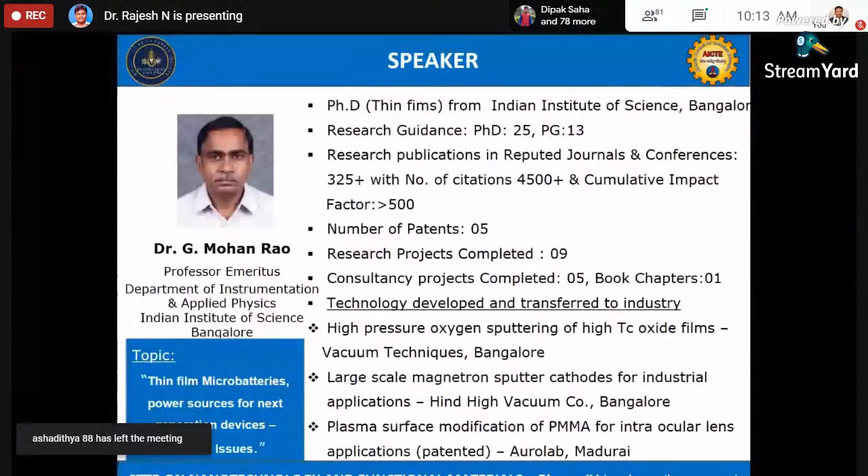Sir, good morning, sir. You can share your screen. Mohan Rao sir, first unmute your mic and then share your screen, sir. Yes, sir, you have unmuted your mic. Now share the screen, sir.

Go to present now, sir. Okay, I'm back.

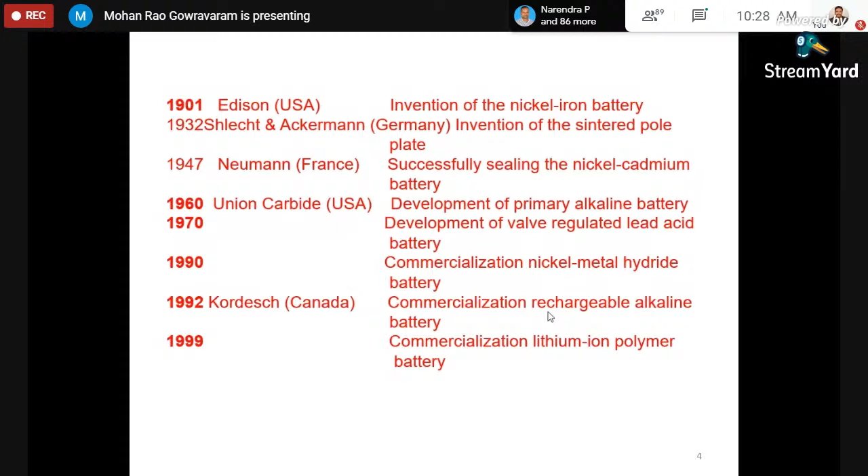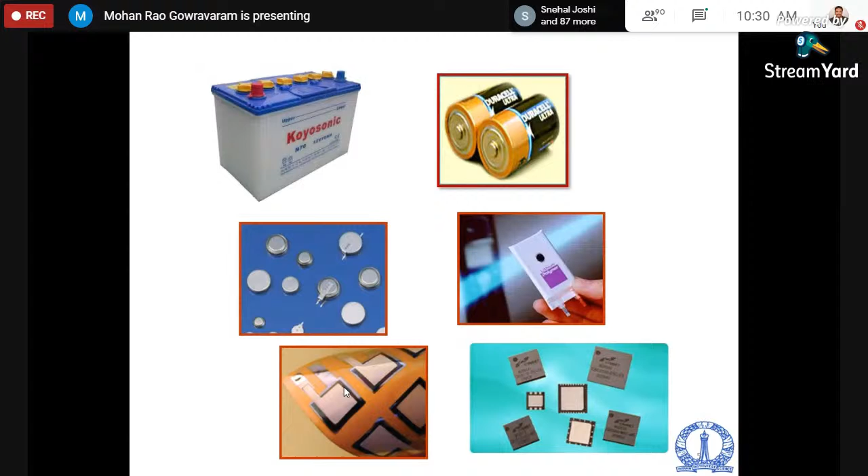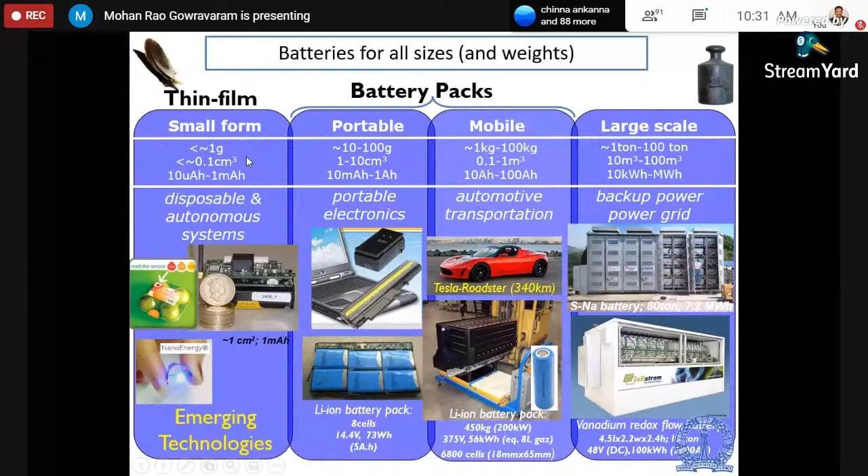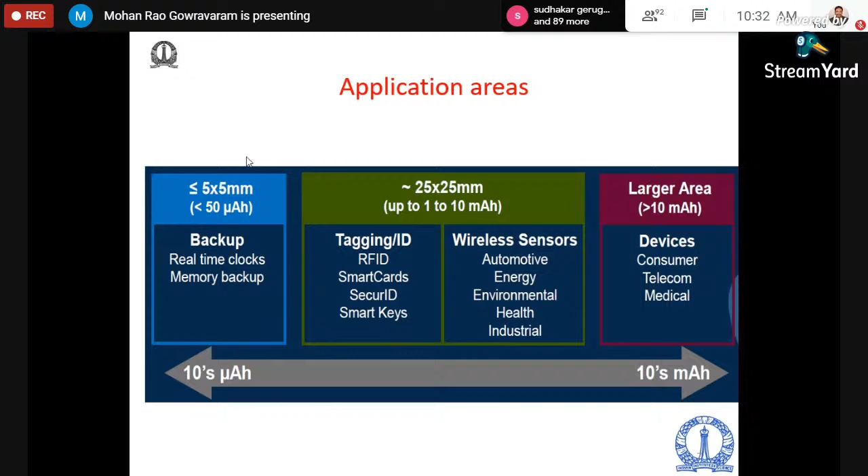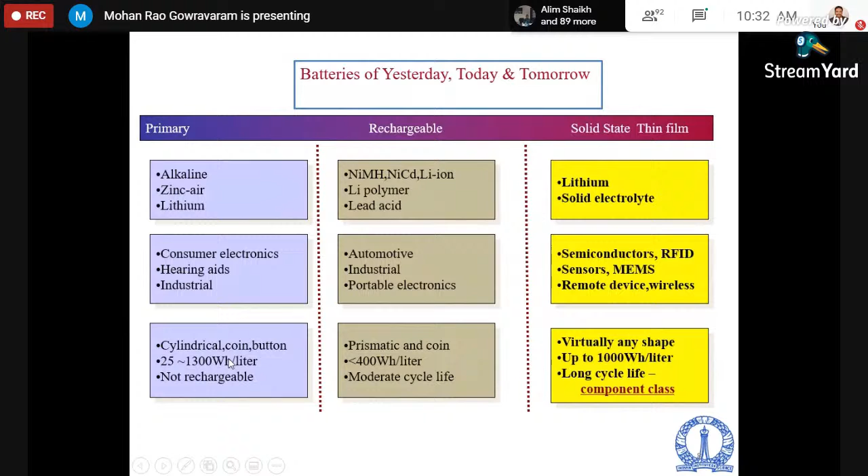Now, the batteries that you come across in your life could be classified into primary batteries and secondary batteries. Primary batteries are your alkaline batteries, zinc air, which could be used for consumer electronics, hearing aids, and all that. They are of the cylindrical cells, button cells, and they are not rechargeable. That means you charge once, you use it, it gets discharged, and then you throw it.

The next battery, which are secondary batteries, which are rechargeable batteries - examples are nickel metal hydrides, nickel cadmium, lithium ion batteries, lithium polymer batteries, and lead acid batteries.

And then the next generation is what is solid state thin film battery, which are primarily, as on today, based on lithium ion battery technology, which uses solid state electrolyte, which could be used for microelectronic devices. It could be of any shape, and it has got long cycle life and long shelf life.

What is this shelf life? Most of the times you would have seen that you purchase a battery today, somehow you don't use it. Whether you use it or not, over a period of few months, it gets totally discharged. So when you have work with that battery, you switch on, it will not work. That means its shelf life is very small.

So the batteries that we are going to talk about are based on solid state electrolyte technology, which means that there is no leakages. So the shelf life is very high, and it could be recycled for thousands of times.

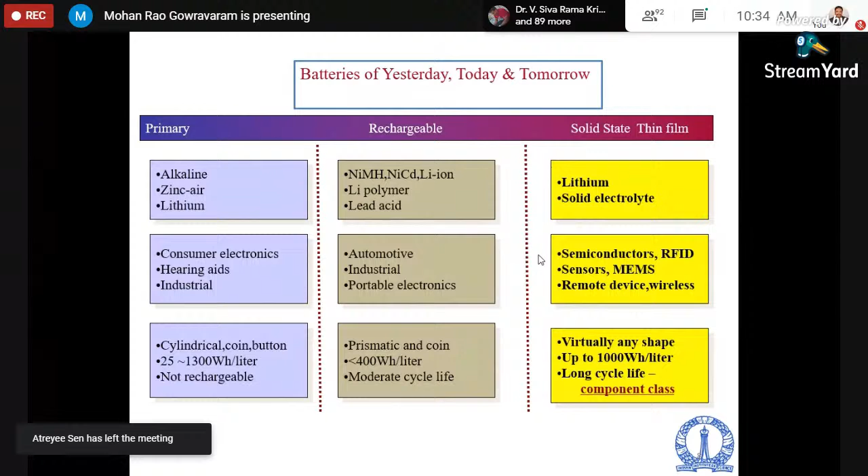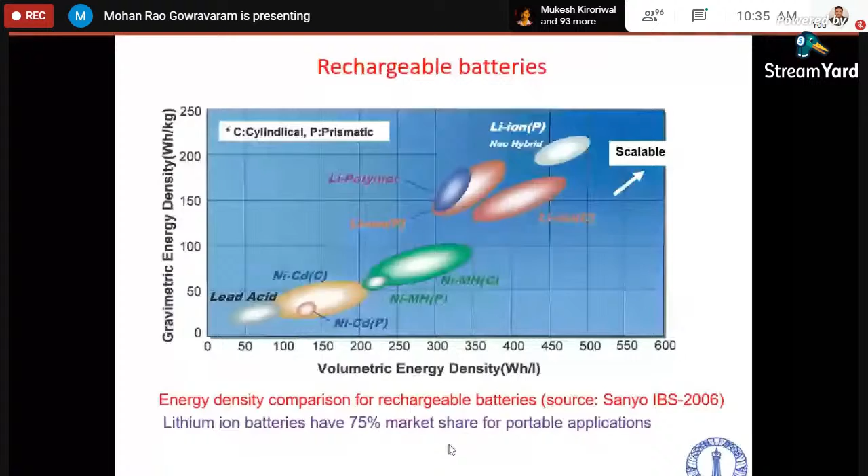Now, the advantages of lithium ion batteries, which are commercially available since early 90s: they have got high specific capacity, twice that of nickel metal hydride, and about 6 times that of standard lead acid battery. They lose only about 5% of charge per month compared to 20% of nickel metal hydride.

And most important aspect of this lithium ion battery is that, as you all are aware, all the batteries that we use give you 1.2 to 1.5 volts output. But these lithium ion batteries are high voltage batteries, which give you 3.8 volts, which is almost 3 times that of the normal battery cell. So that is an advantage.

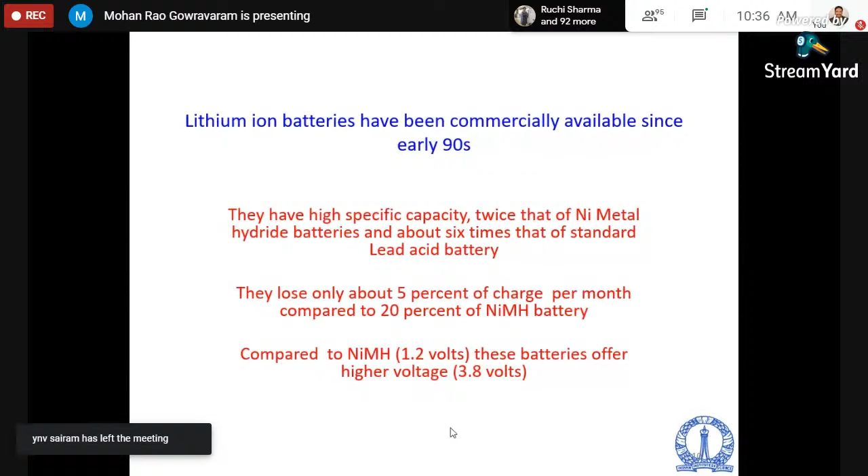Now, how does this lithium ion battery work? Before we get into this, let me tell you why people started looking at making a battery in a thin film form. I'm sure most of you are aware of what these thin films are.

Now, thin film is nothing but, it's again a material in a microscopic form. It has got dimensions which are macroscopic across the length and width, but along the thickness, it is microscopic. It will be less than a micron thickness. Now, why do we need this?

For most of the applications, we do not require the bulk material, but it is a surface phenomena that we use for applications. For example, if you are trying to draw a current of less than a milliamp, what is the point in using a wire which is 1 mm thickness, which can draw current of 5 amperes?

So, when the microelectronic revolution took place, when the power consumption for the devices has come down, people started making microelectronic devices with thin film electronic components like resistors, capacitors, and all that. And the interconnects also were made by thin films. So the thin film technology grew along with the microelectronic technology. Then people thought in early 80s, when the integrated circuits entered the phase of VLSI, though the size of the chip has come down to less than 1 centimeter by 1 centimeter, with a density of more than a million transistors, the way you power this device is still the old way.

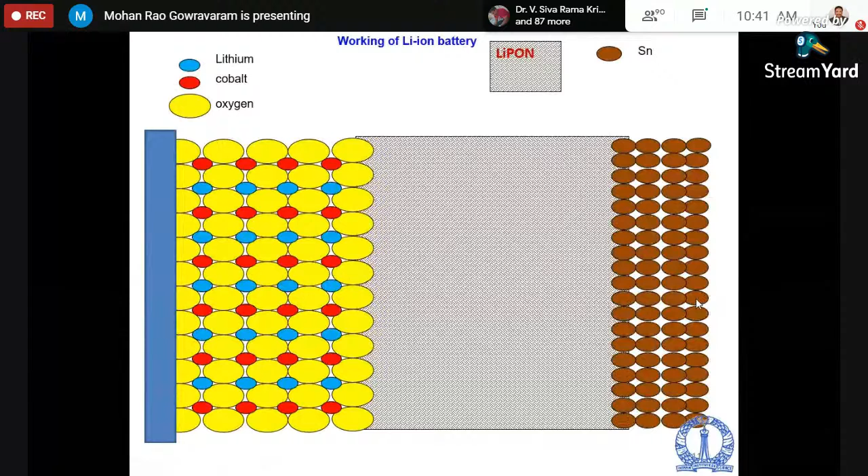Whereas in your mobile phone, you do not have the solid state electrolyte. What you have is a polymer gel material which replaces the LiPON. Then comes the anode, which could be an electrochemically active metal. In our case, we are going to see how tin could be used and why tin has to be used.

Now, this is the assembled battery that you have in the totally discharged state when you assemble it. Now you start charging the battery. When you start charging, the lithium from the cathode migrates towards the anode through the electrolyte, and this process is called intercalation. Now you keep charging it. Based on this reaction, electrons are generated. Once it is in a fully charged state, you see that a virtual layer of lithium has formed between the electrolyte and the anode. So now it is in a fully charged state.

Now on the cathode side, you see that almost 50% of the lithium has moved to the anode side. For the structural stability, it loses only 50%. If you try to draw more than 50% of lithium, the cathode loses structural stability and it collapses.

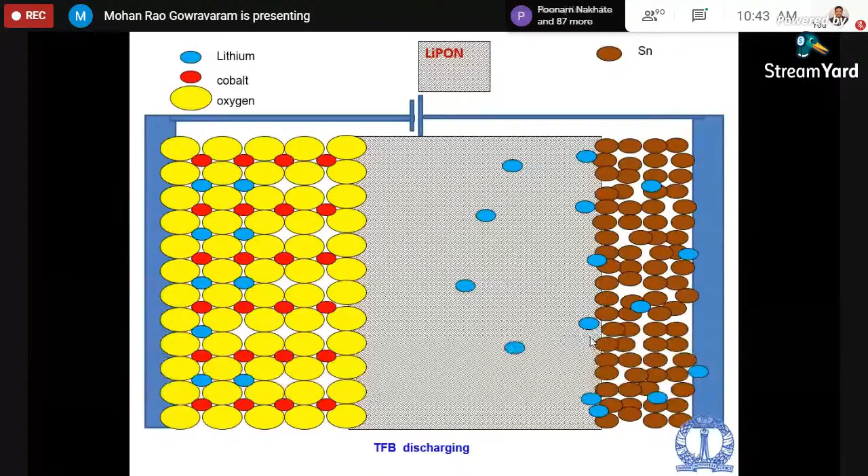Now, once you are in a charged state, you try to use it - that means you are trying to discharge the battery. When you start discharging, the lithium that has gone to that side will come back to its original position. By the time it is fully discharged, all the lithium should come back, ideally. But it doesn't happen. Sometimes some lithium is left behind because it feels more comfortable there; it doesn't come back. Because of this, for the next cycle when you are charging, the capacity will reduce. So with each cycle, if some lithium goes and sits there, finally the battery will die.

Now, when you try to make a good battery, the first important aspect is that all the lithium that has gone there should migrate fully, and whatever has gone should come back. That means ideally this should be a porous structure for the anode. The second aspect is that when the lithium goes from the cathode to the anode during charging, there is a volume expansion taking place. And when deintercalation takes place - that means when it is discharging or when the lithium is coming back - there is a contraction taking place. That means during the charge-discharge cycle, your battery is undergoing volume expansion and contraction. So structural stability is very important to accommodate this volume expansion and contraction.

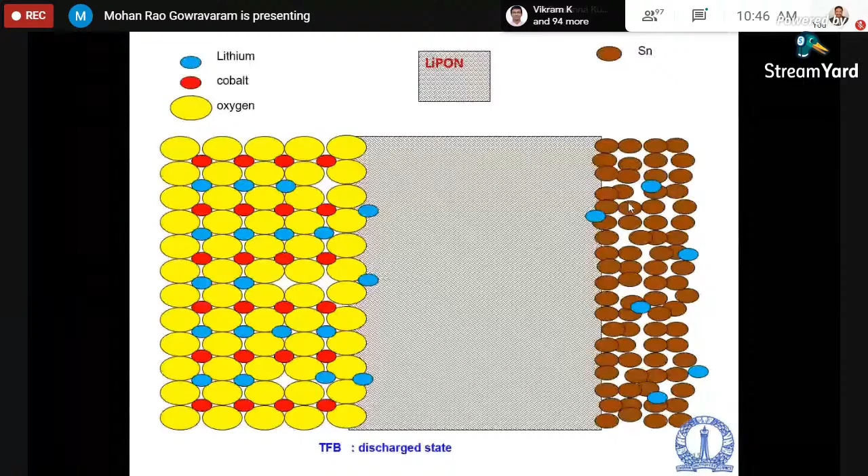Now, what happens when there is a volume expansion? At the interface, there will be a lot of stress, so the film will peel off, and the battery will collapse. So one has to be really careful with the process to make your layers deposited such that this volume expansion and contraction business is taken care of. Let us see how one can do that.

Having known something about this battery, let us see what a thin film battery looks like. A thin film battery is a robust, rechargeable, micro-sized solid-state energy storage device. It has got extremely long cycle life, very low self-discharge, high power capability, etc. And it is very safe because there is no liquid electrolyte.

Now, what is this liquid electrolyte problem? Why is it not safe? When Sony developed the first lithium-ion battery and used it in their mobile phones, there were heavy casualties in the sense that during charging, the battery blew up, causing casualty of the person standing nearby.

What happens is that in bulk batteries, over a period of time, the anode used was carbon, graphite. This graphite forms dendrite structures, and through the electrolyte, it pierces through and touches the cathode material during charging, and it short circuits, and that's how sometimes the batteries blow off. Even today, not that often, but still we come across news items saying a battery has blown up while charging. So this is the reason.

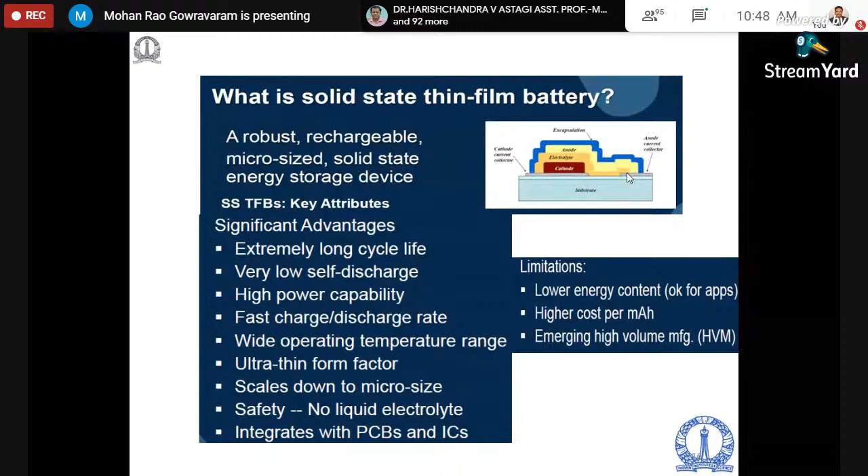Now, as you look at this structure of a thin film battery, it has got a substrate. That means a substrate has to hold the thin film you are going to deposit, because the total thickness of the battery we are talking about is less than 10 micrometers. So for structural stability, it should be placed on a substrate. Now this substrate doesn't play any role in your battery, so it could be anything. If you remember in the first slides, I showed that tomorrow you can have a battery on a polymer sheet also.

So this is what it is. You have got a substrate, originally thought to be silicon because they wanted to make it for microelectronic devices. Then you deposit a current electrode, current collector, and then you have a cathode layer, that is lithium cobalt oxide. Then an electrolyte layer is built onto this one, that is your LiPON, and then there is an anode layer, and then a current collector. As I said, the entire thickness of this battery is less than 10 micrometers, whereas your silicon substrate is not less than 250 micron thickness.

Now it could be fabricated on any shape, size, etc. You could use any substrate: silicon, alumina, quartz, polyester, kapton, whatnot. Anything could be used.

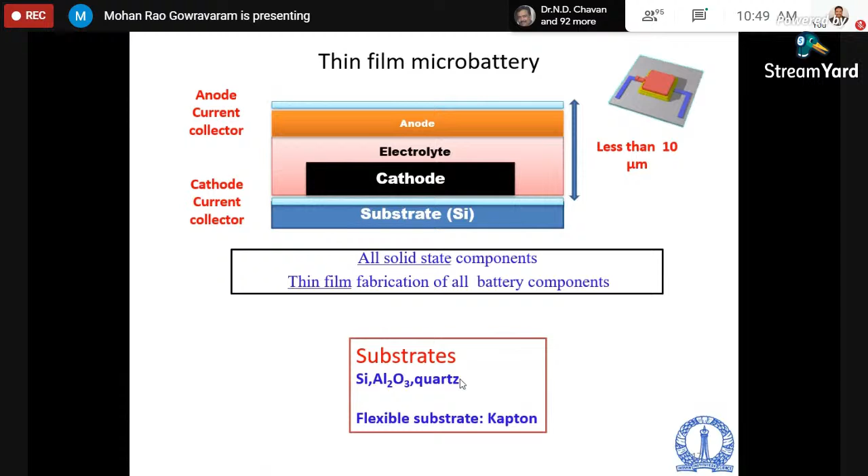Now, as I said, the issues when you make thin films of any material are that, if you remember, we said lithium cobalt oxide is electrochemically active when it is LiCoO2. That means when you are trying to deposit a thin film of this material, the thin film also should have these elements in the same proportion: 1 lithium, 1 cobalt, and 2 oxygen. That's the first issue. The second issue is that you have a substrate onto which you are depositing a cathode layer, and then electrolyte layer, and then anode layer. That means each of these layers should stick together effectively.

Then the third important issue is it should be able to take care of the volume expansion during lithiation and contraction during delithiation process. And finally, it should be stable against ambient conditions. What is there in the ambient? Most of it is water vapor, oxygen, and nitrogen. Nitrogen doesn't react with this, but water vapor and oxygen, it reacts. So the entire device has to be packed properly so that it is protected from the environment.

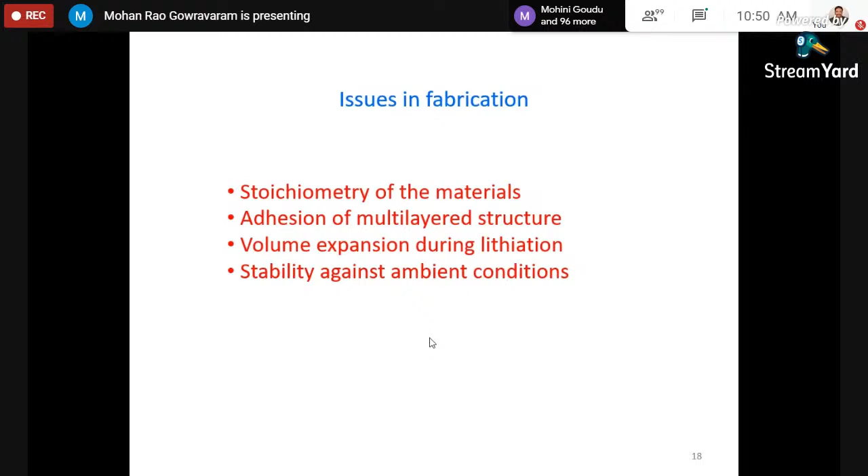Now, having understood the issues involved in making a thin film battery, let us see how one can realize these thin film batteries in real life.

Now, these materials are well studied in bulk form, but then they have to be deposited in thin film form. So people use techniques like sputtering or evaporation to deposit any material in thin film form. Since this is a workshop on material science, let me tell you one important thing: every day a lot of new materials are being discovered for several novel applications. But it has come to a stage that no matter what material you discover, unless that material could be deposited in thin film form with similar properties, that material has no value, because today all the applications of this material have thin film form in it. That means miniaturization is the theme of any device today.

And how you deposit these thin films is basically by two important techniques. Though there are several other techniques, these two are still predominant: one is evaporation, the other one is sputtering. Now, for the sake of people who do not know what evaporation and sputtering are, I'll spend a couple of minutes. Any material will have three states of matter: solid, liquid, and vapor. So you have a solid material, and when you heat it, it becomes liquid, and you heat it further, it evaporates. Now, what is evaporation?

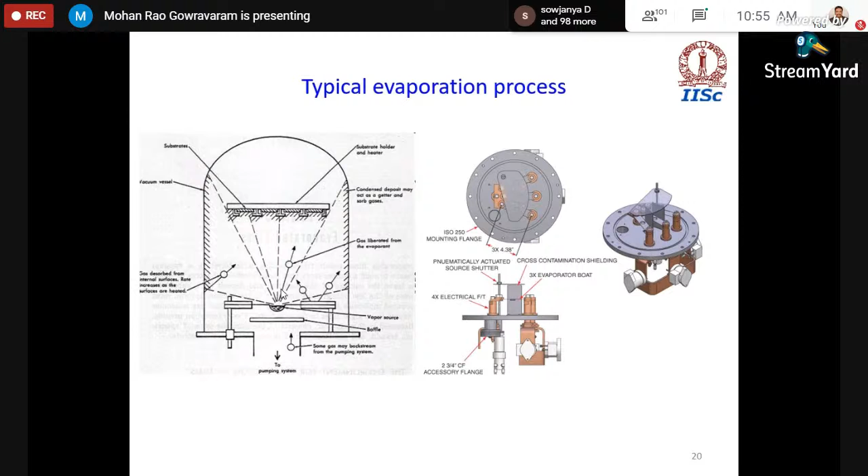Now, if you have got a single element in your material, then there is no issue. But if you have got 2 or 3 different elements, then what happens? Each element has got its own vapor pressure, so all of them will not evaporate in the same proportion that is available in the bulk material. So this kind of technique cannot be used when there are multi-elemental materials. So people go in for another technique called sputtering, where you have the material lattice, and then you bombard it with an energetic particle.

Typically you use an ion. So when the ion bombards, what happens? It is like a carom board. In a carom board, you arrange all the coins, whites and blacks, in the center, and in the center you have a red, and you have a striker with which you push towards the center. Depending on the angle at which you are hitting, and the energy with which you are hitting, the probability of pocketing the white in the first attempt varies. Sometimes the striker may not even reach the lattice.

Exactly similarly here, depending on the ion energy and the angle at which it is bombarding, the atom that comes out will vary. So the ion transfers its energy and momentum to the surface atoms, and these surface atoms come out and travel, because it is done in vacuum, and then deposit onto the solid surface that is kept in the line of sight. This is the sputtering process. Here, basically energy transfer is taking place. No heating is taking place, so there's no vapor pressure concept.

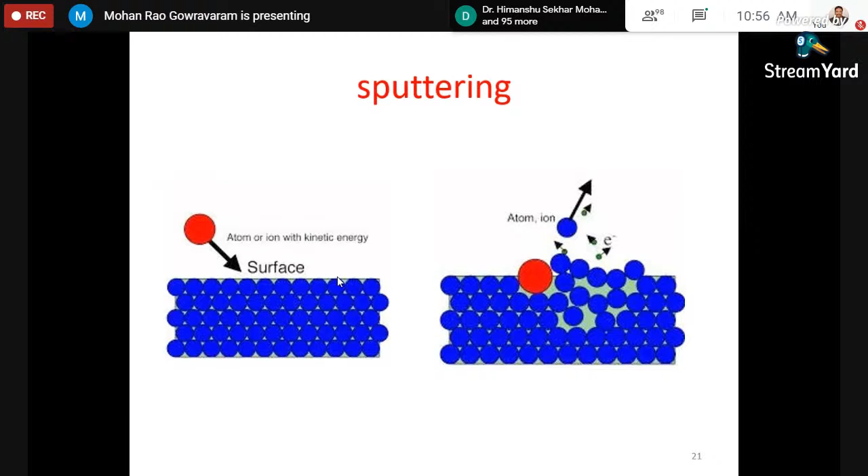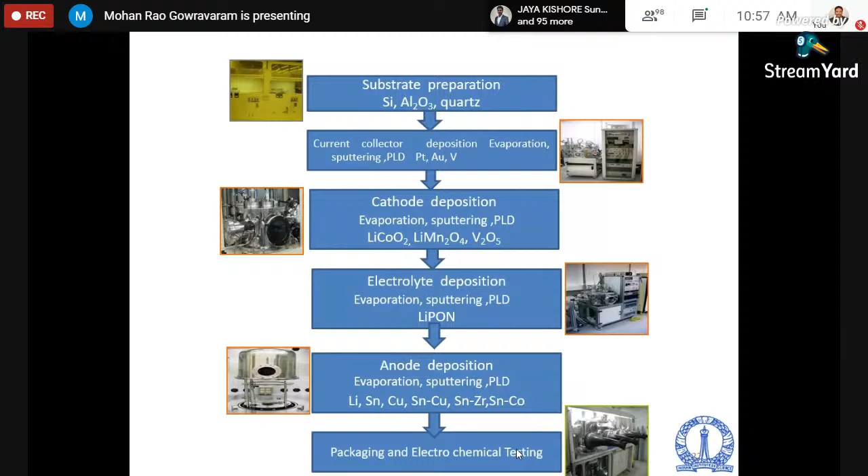So with this, if you try to develop thin film batteries in your laboratory, like any other materials research, you have to undergo all these steps. You start with the preparation of your substrate, meaning you clean your substrate properly, and then you have a deposition chamber where you deposit a current collector, then another deposition chamber for cathode layer deposition, then electrolyte deposition, then anode deposition, and finally packaging and electrochemical testing. So these are all several steps involved in developing a thin film battery. This is on the fabrication side.

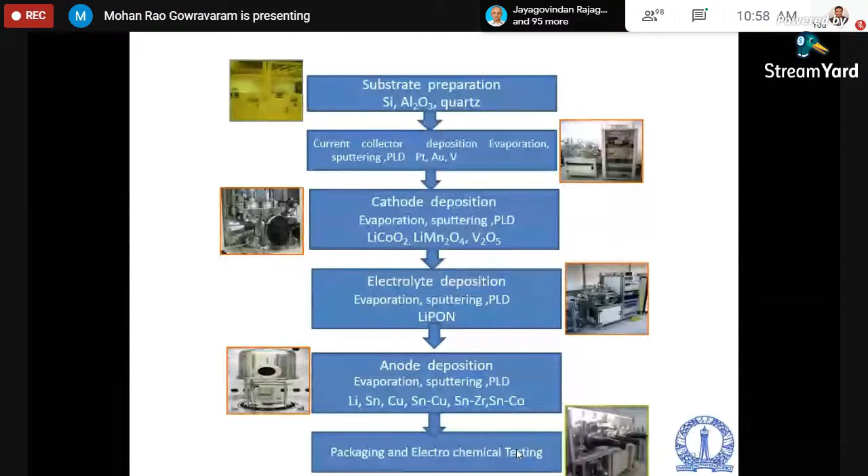But then at the development stage, at each stage of this material development in thin film form, it has to be characterized so that you are sure that it has got the same stoichiometry and same properties as the bulk materials. So you have to do all this kind of characterization for arriving at a final thin film battery device.

So this talk essentially is on taking a raw material, how you end up making a device. So what are all the steps that are involved at each stage? We'll see what are the tools that we use.

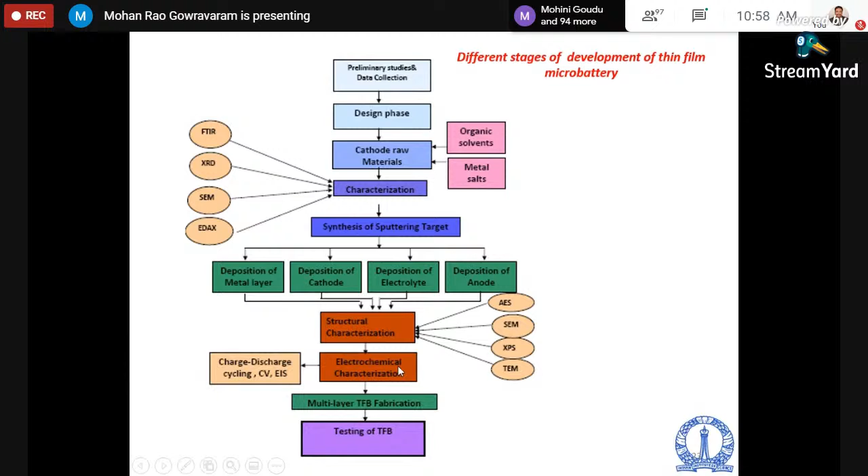These are all typical characterization techniques that you use, like FTIR, X-ray diffraction, scanning electron microscopy, and for chemical composition you have EDAX. And for cleaning and other things, you use organic solvents and metal salts, and then you synthesize a sputtering target. Then you do all this kind of structural characterization, electrochemical characterization, and multi-layer fabrication, and all this.

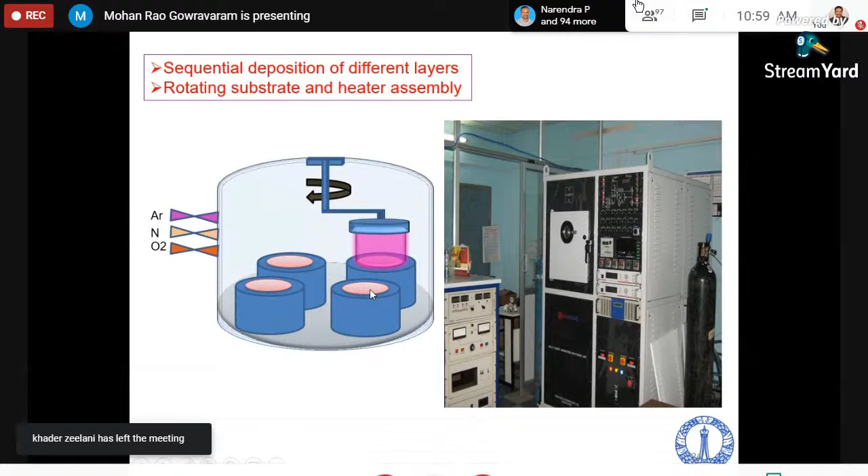So this is a typical sputtering system, which has 4 cathodes. Cathodes have the material that you have to deposit in thin film form, and on the anode you keep your substrate or wafer, which could be rotatable so that it moves from one target to the other target. So you start with metallization first, then cathode layer, then the electrolyte layer, then the anode layer, and then come back to metallization.

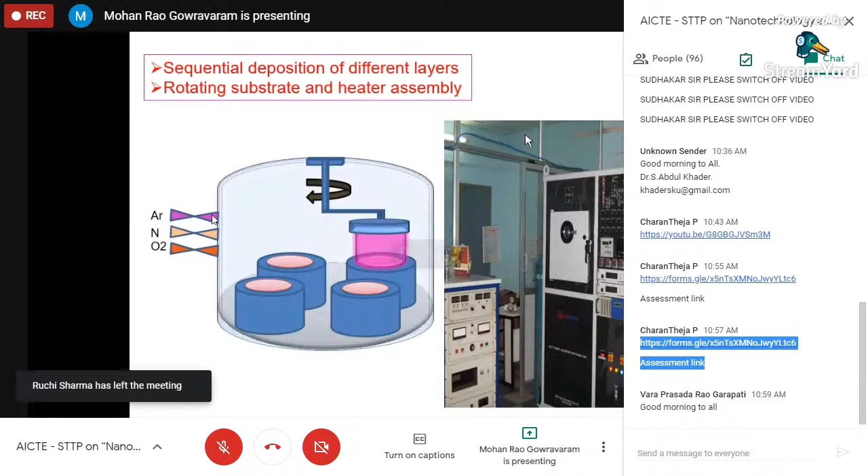The gases that you are using are argon for striking the plasma, nitrogen for depositing LiPON, because if you take a lithium phosphate target Li3PO4 and put it in nitrogen plasma, some nitrogen replaces oxygen. Oxygen is also introduced during deposition of lithium cobalt oxide, because when sputtering lithium cobalt oxide there is a possibility of dissociation of some oxygen, so that has to be replenished by external oxygen.

Now, on the surface of your target, there will be a lot of contamination because it was exposed to the ambient. So initially those layers have to be removed, and at the development stage in a laboratory, one can use what is called an optical emission spectrometer to see whether your target is in good condition or not.

How it works is that your sputtering process involves a plasma. Plasma is nothing but ions and excited species of the materials present inside the environment. So as the material is getting sputtered, it gets ionized or gets excited, and then you collect the light through an optical fiber and give it to a monochromator, and this is the spectrum that you see.

Now, if you are sputtering lithium cobalt oxide in an argon and oxygen environment, the ideal condition is that you see lithium, cobalt, oxygen, and argon ions or excited species. If you see anything else, that is a contamination.

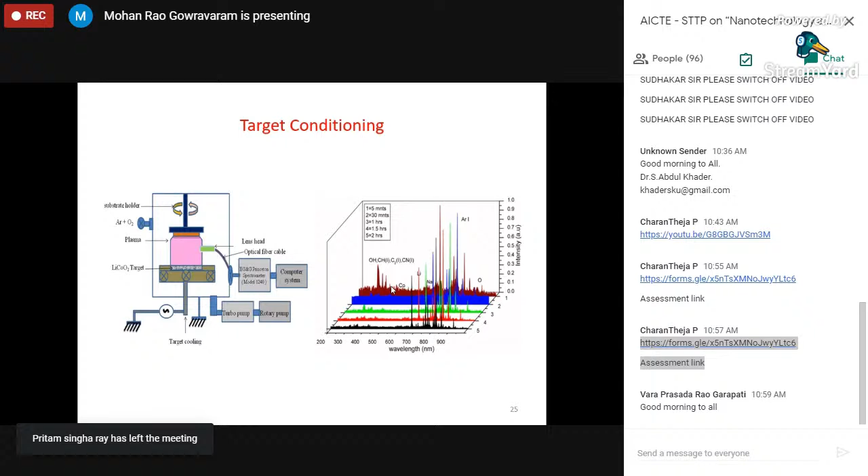And then comes the most important thing: at what pressure you have to do sputtering, what should be the distance between your target and the substrate, and what should be the substrate temperature to get a stoichiometric film.

Now please remember, this is for the young people who are listening to this talk. Most of us do research based on what is called literature survey. When you start research, your guide will say, first go and do a literature survey on this material, how people have formed this thin film. You come with some data.

So somebody has put it at this pressure, this temperature, so I'll also do this. Now, we also did like that. The student did exactly with the same conditions listed in the literature, but it did not work. Then we realized why we did not get the thin film.

Now you have to remember one important thing, that the scientific literature has got certain issues, in the sense that if it is a technologically important research, people will not reveal the actual process parameters. Why should somebody take my hard work? That is the basic idea. So one has to use some common sense also.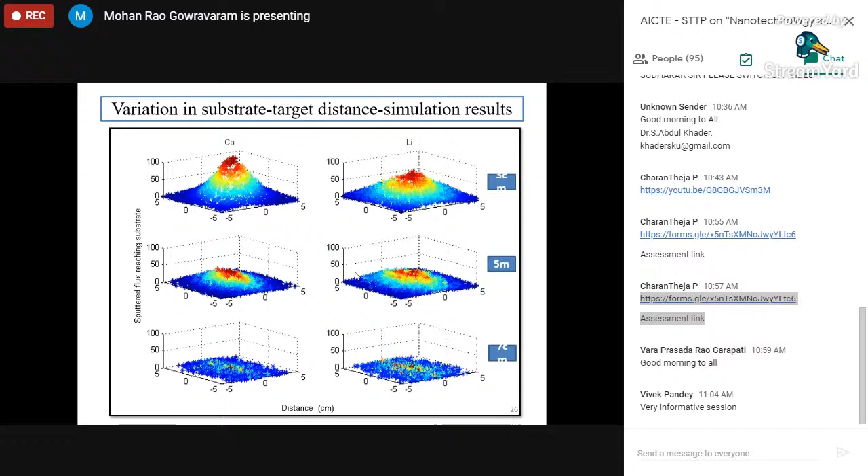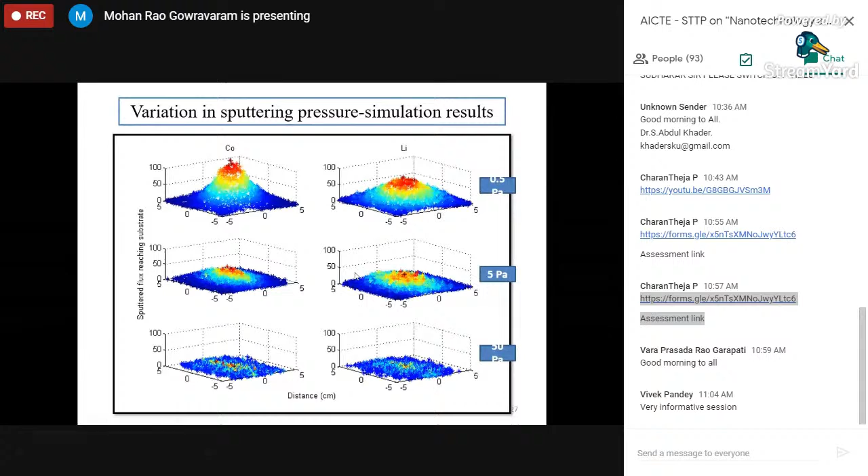Similarly, you simulate what happens when you change the pressure. You come out with some pressure data where you see all the elements present in your film. So you use this target to substrate distance and this pressure and deposit thin films, and then you find out what is the cobalt and lithium atomic ratio, and then you optimize the process parameters.

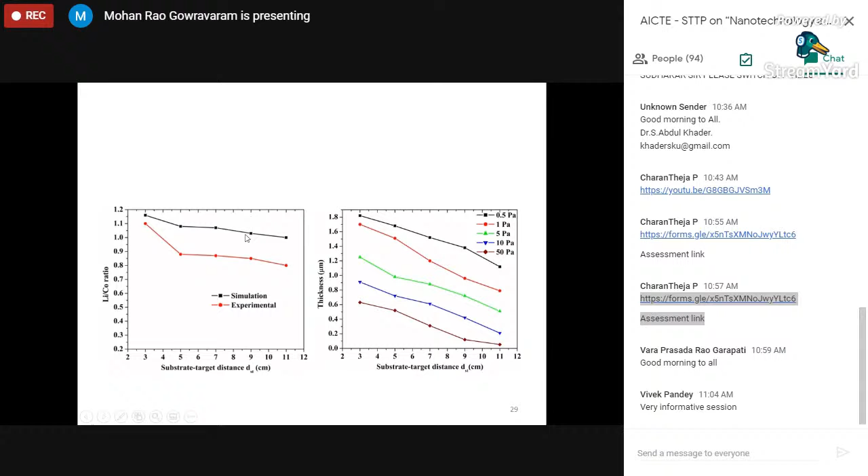So here you see the simulated data and the experimental data. That means this is where one has to deposit thin films. With this, you deposit a thin film of lithium cobalt oxide. Now your job is not just to deposit a lithium cobalt oxide film, it should be electrochemically active because that is going to be the cathode material.

So you perform an electrochemical study, which is also called CV study. One is the oxidation peak, one is the reduction peak, that means it is electrochemically active. The film gave a charging capacity of 160 microampere hour per centimeter square and a discharge capacity of about 130 microampere hour per centimeter square area for 1 micron thick lithium cobalt oxide film. That means your lithium cobalt oxide is working.

Now your job is to check whether it is rechargeable. You keep working for several cycles and it worked for more than 30 cycles. So now it is rechargeable. The first part of your battery is ready.

Now you move to the electrolyte material. As I said, liquid electrolytes have got very high ionic conductivity of the order of 10 to the power of -1 Siemens per centimeter. But your solid state electrolyte has got 10 to the power of -4 to -8 Siemens per centimeter, which is very low.

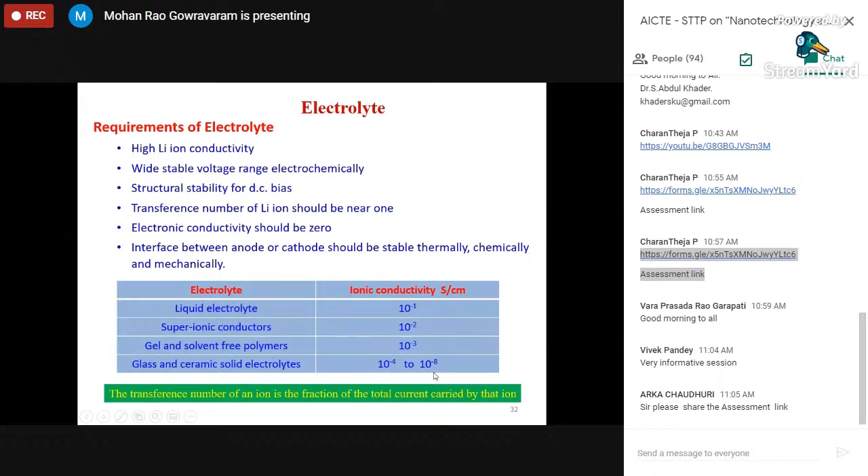So the material that has been found to be capable of giving an ionic conductivity of 10 to the power of -6 Siemens per centimeter is what is called lipon, which is nothing but Li3PO4 in which nitrogen is put. This was patented by John Bates of Oak Ridge National Laboratory in USA, and till today, that is the electrolyte material people all over the world are using to make a good battery. Though there are several other new materials that have come out at laboratory scale, when you go to an application, still this is the material being used.

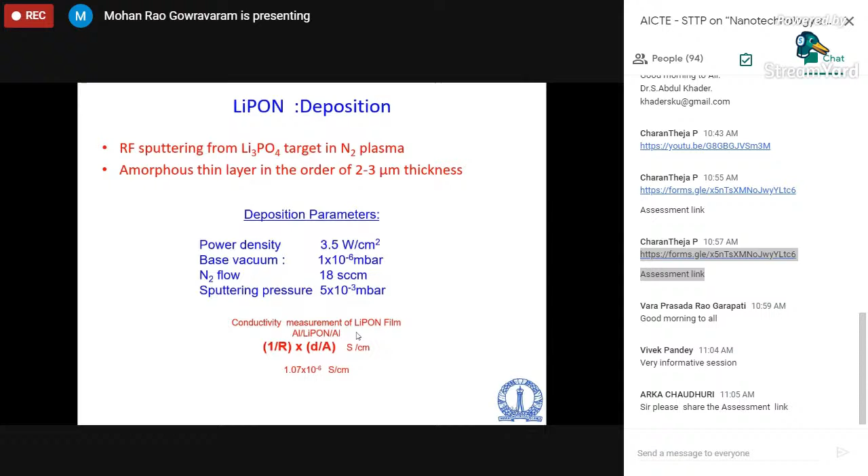How you sputter this is that you take a lithium phosphate target Li3PO4 in nitrogen plasma, you sputter at a certain power density and other conditions, and then you deposit a thin film of lithium phosphate, lipon, and then you measure to see whether nitrogen has gone in, because unless nitrogen goes in the required quantity, it is not an ionic conductor.

So you do an XPS and find out that nitrogen is there, and then you test its electrochemistry, or electrochemical impedance, to measure the ionic conductivity. By optimizing the parameters, you get 1 × 10⁻⁶ Siemens per centimeter, which is close to its bulk value.

Having achieved this, you are very happy. You go back, and next day you come back and check its conductivity again. Within 24 hours, what you see is an amazing phenomenon: its ionic conductivity reduced drastically, going to about 2 × 10⁻⁹ Siemens per centimeter, which means it will not work.

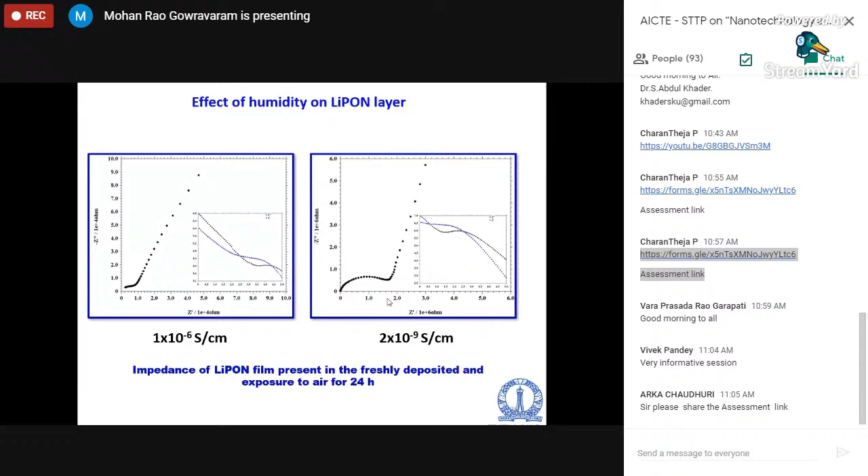Now, the stress comes because of thermal expansion coefficient mismatch, lattice mismatch, and all that. So ideally we thought this may be the reason. Then what we have done is deposit this lipon film on silicon, but with an intermittent layer of titanium.

Now, when you are in a depressed mood, when you are stressed, ideally what you are supposed to do is go and talk to somebody who can console you or who can take your stress away.

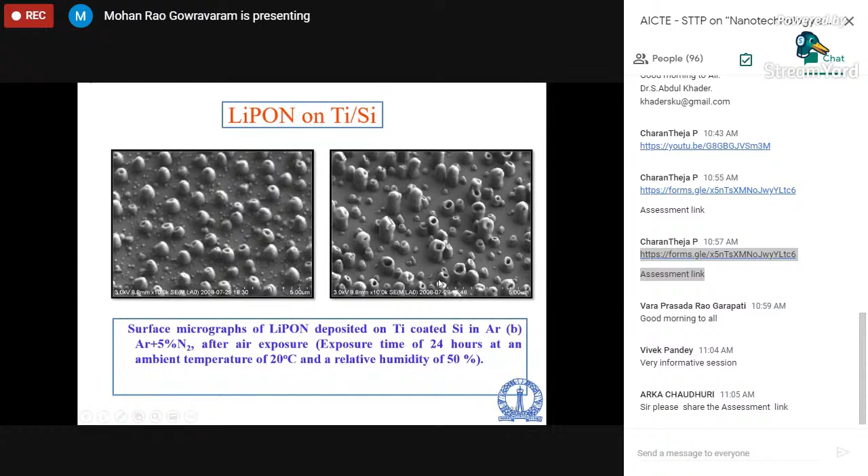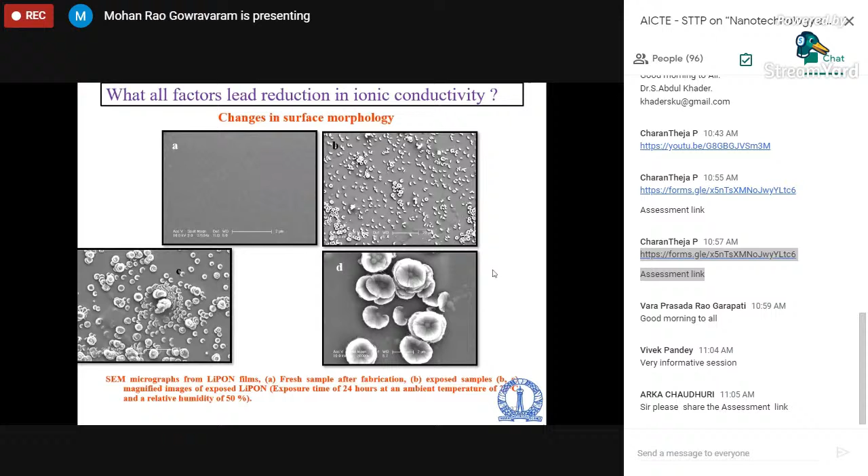So you do all kinds of studies, and it was found that the lipon is reacting with the moisture in the environment and forming a gas called phosphine, PH3, because of the phosphorus present in your lipon. This gas is trying to come out, and that's how these eruptions take place. So the lesson learned from this experiment is that once you deposit your lipon film, don't expose it to ambient conditions, but store it in a dry environment or a vacuum environment. Then it will work. So now your second layer is also ready with the lesson learned.

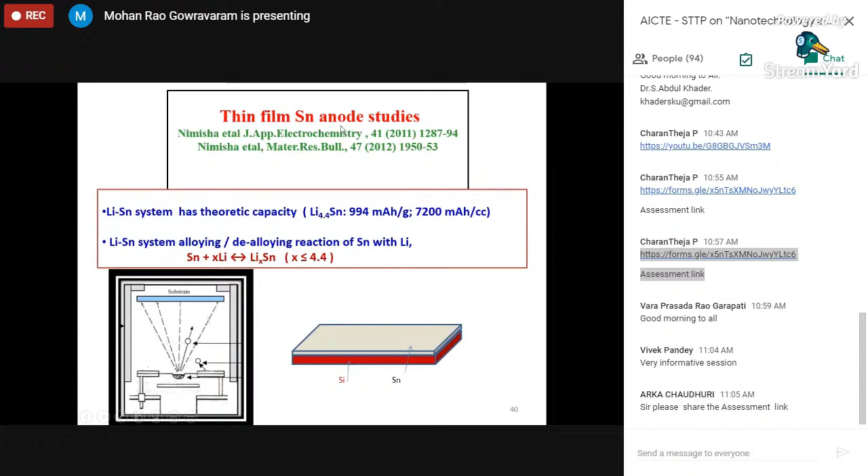Now you go to your third layer, that is the anode layer. What we want here is, since it is the anode which is taking this volume expansion contraction business, it should be a soft material and it should be a porous material. Soft materials are tin, aluminum, copper, lead, etc. But lead is heavy, so we arrived at tin layer, that is SN. You deposit SN because that has a low evaporation temperature. You deposit by evaporation process, and this is how you get the film.

Then you do electrochemical study. It is working for several cycles. You are very happy. But then what happens is that for repeated cycles, the capacity drops. That means it is not porous. All the lithium that has gone on the other side has not come back. So the capacity reduction is more than 90%, which you do not want.

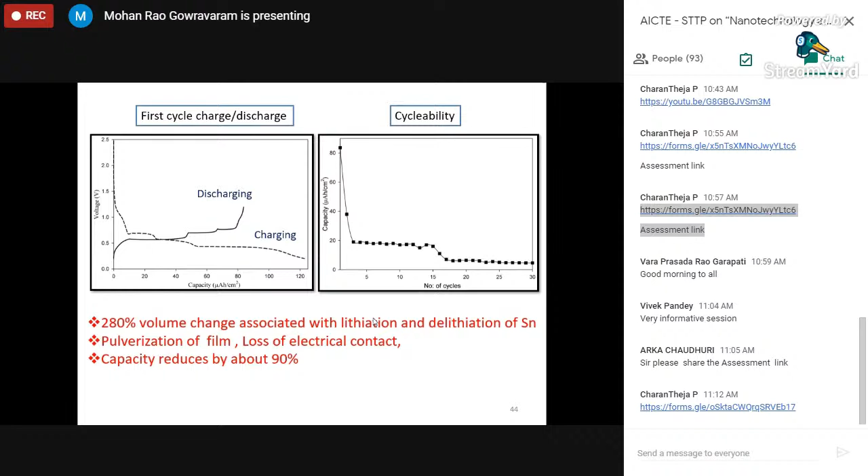Now what happens? You have all the three layers that have been separately optimized. Now the task is to put all of them together and see that it is working.

Now comes the most difficult job. In a class, you have a group of intelligent people, so-called intelligent people, who always get the first few ranks. There is a competition among them. Now you want to get a project done, so you put these three intelligent fellows in one group, expecting the project to succeed. Then what happens? Most of the time it will not work, because each of these fellows tries to take the project in his own direction. He says, I am the boss, you have to listen to me.

Now here you have got three different kinds of films: lithium cobalt oxide, lipon, and tin. Each of them has its own characteristics. They don't go along well. So you have to match the conditions properly such that they stay together in a cohesive way. Then only will the battery work as a device.

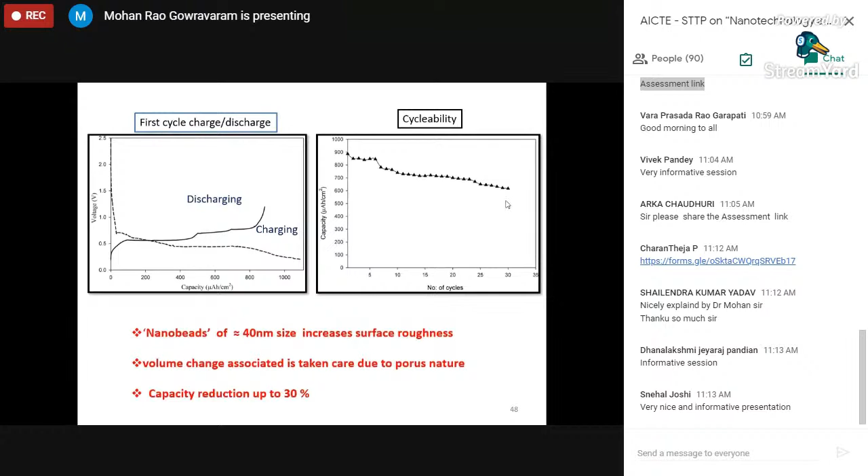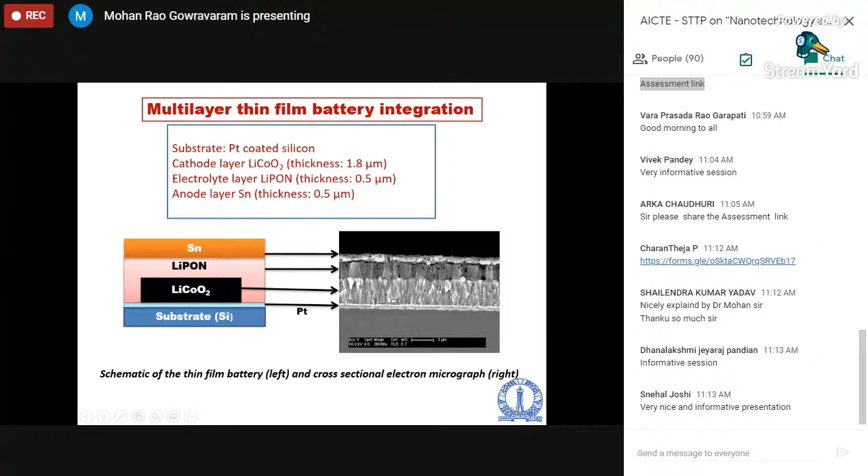Cathode layer of 1.8 micrometer thick, electrolyte layer of 0.5 micrometer thick, and anode layer of 0.5 micrometer thick. So now your battery is ready.

Now we have learned a lesson earlier that it should not be exposed to the ambient. It has to be packaged in the proper way. How do you package in a laboratory? You are developing in a laboratory, not in an industry where packaging technology is available. So what kind of packaging do you use? Now use your common sense.

All of us know Horlicks. You see a lot of advertisements for Horlicks. Horlicks is a good health drink, right from newborn to old people. But then, in a kitchen, when you go to mix Horlicks, there is always a precaution that you are not supposed to put a wet spoon into Horlicks. What happens if you put a wet spoon into Horlicks, or even if the Horlicks bottle is not closed properly? The next day when you open the bottle, you don't see powder Horlicks, but you see a solid rock-like Horlicks rock, which you cannot dissolve. It has to be thrown away. What happened is that your Horlicks has reacted with the atmospheric moisture. Even one drop of water is enough to kill 1 kg of Horlicks.

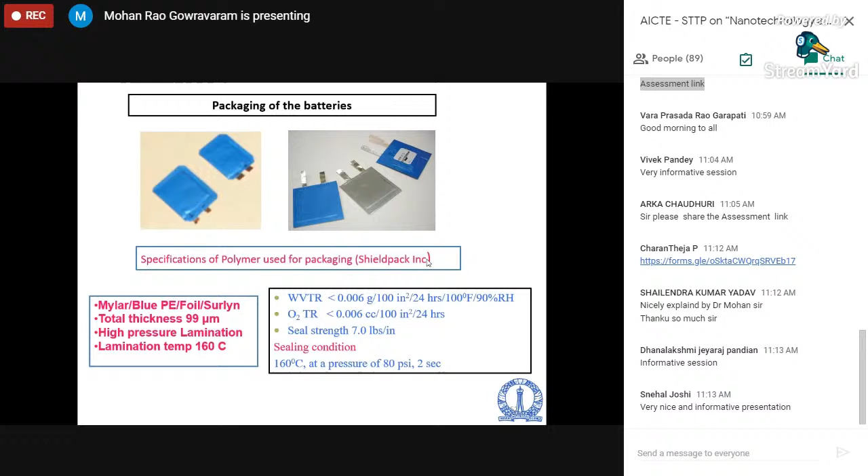So it doesn't work. Now you go to a supermarket and get Horlicks refills with polymer packaging. We thought that is the best pack for making packaging for our battery. So we wrote to Shieldpack Inc, which supplies to the Horlicks people, and they generously gave us a few sheets for research work, along with the specifications of this packaging material.

Its water vapor transmission rate is about 10 to the power of minus 3 grams per 100 square inches for 24 hours at a temperature of 100 degrees Fahrenheit and 90% relative humidity. Similar is the case with oxygen transmission. And it could be sealed at a temperature of 160 degrees in 2 seconds time.

Now, this polymer packaging is not a simple polymer, it is a multi-layer polymer packaging. It has about 14 alternate layers of metal and polymer to prevent water vapor from entering into the pouch and reacting with the Horlicks.

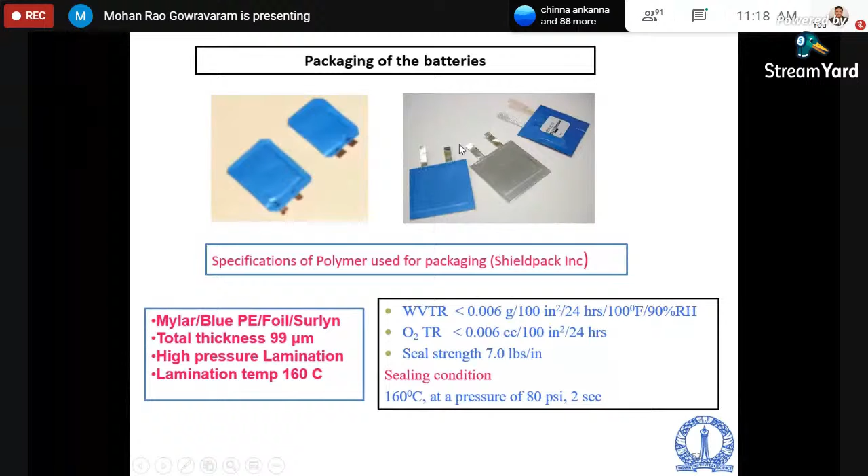So what you do is cut this into the required size and make a pouch-like thing. You take an iron box, the kind used for clothes, and press it so it seals at the edges. Then you put the battery you have deposited inside, take the two leads out, and press it again. It seals here also, so now you have a battery that is ready.

Now once your battery is ready, you have to test it. Unless it works, you are not happy. So it works, but then what happens? After about 7 cycles, the capacity drops, and after about 2 more cycles there is no more charging or discharging - it is dead.

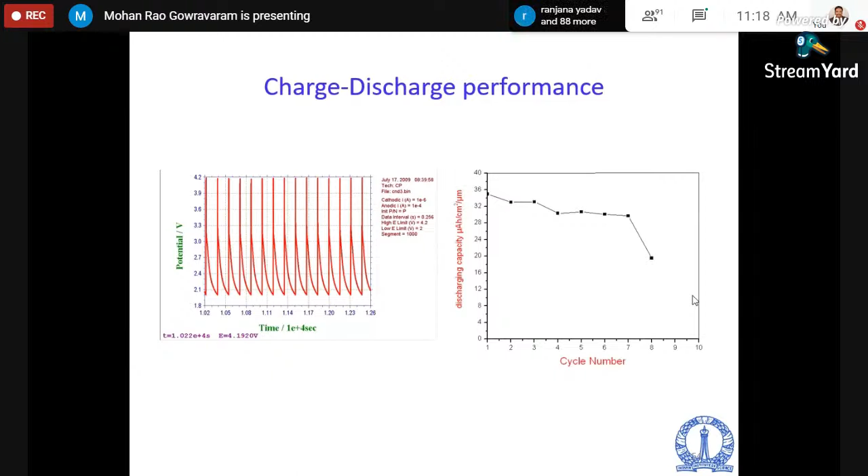So the packaging that you have done is not fully foolproof. Now you try to analyze what is wrong with your battery, where it went wrong. You cut it open and see that your layers are no longer layers - you see a lot of blisters like this, which we have come across earlier.

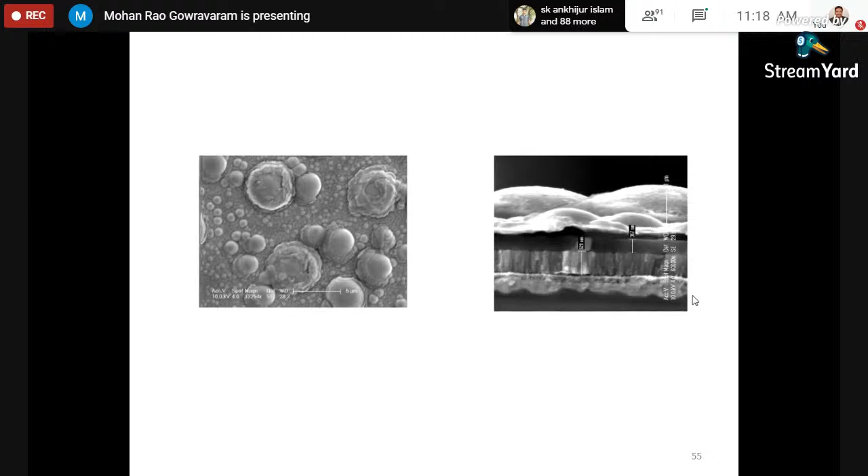Now you try to analyze each of these layers separately. That means you start your research back to square one - go to each layer, do this cycling business, and after a few cycles, analyze. Now in the lithium cobalt oxide, after a few cycles, what we have seen is that a lot of cracks like this have been formed.

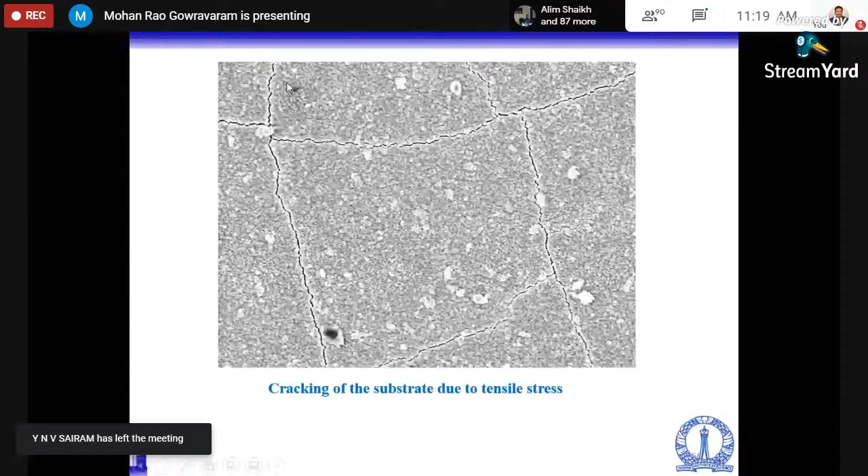Now you try to analyze what could be the reason for the stress. The expansion coefficient alpha of silicon, your substrate, is about 2.8 into 10 to the power minus 6 per Kelvin. Whereas that of platinum is 9 into 10 raised minus 6, and that of lithium cobalt oxide is 34 into 10 to the power minus 6. So where is 2.8, where is 34? Nowhere is it matching. So when you are annealing your film to get the crystallinity, because of this mismatch in thermal expansion coefficient, it is delaminating. So this is not the ideal solution.

Now you test your lithium cobalt oxide with liquid electrolyte. What is done here is that we found out that if you use aluminum, which has a thermal expansion coefficient in between that of platinum and lithium cobalt oxide, it acts as a buffer agent. So we deposited a layer of aluminum across this and then deposited lithium cobalt oxide. But the problem is that when you deposit aluminum, you cannot heat it to a very high temperature, not more than 450 degrees, so your capacity will come down a little.

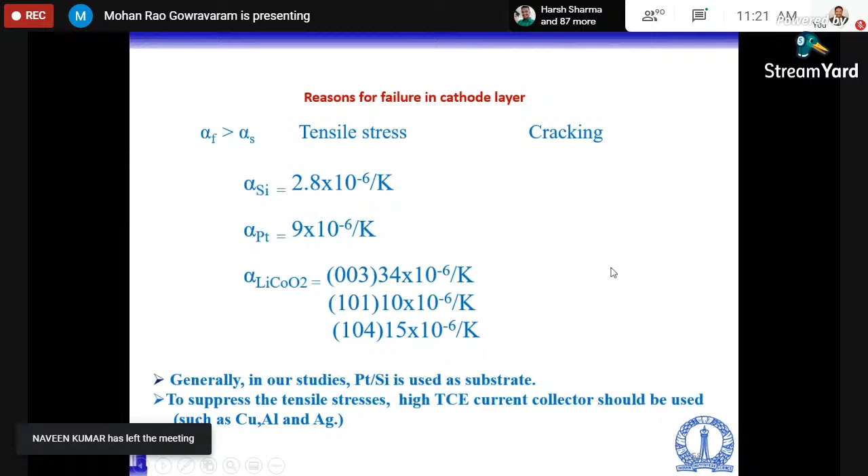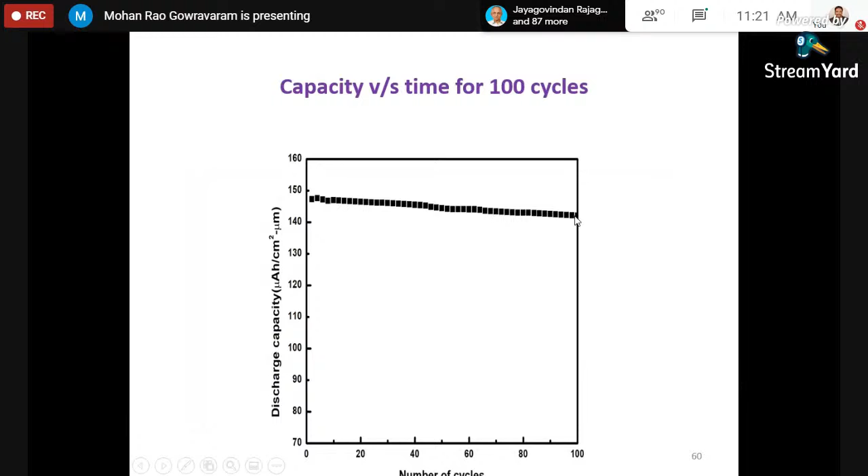So with that aluminum, you deposit this and then optimize the parameters, and you have, even after 100 cycles, the discharge capacity has not fallen. So it is a very good modification to the process that we have done.

Now, then you have to protect the interface from moisture and oxygen. How do you protect the layers? What is done here is that after all the depositions are done, on the top we have put an aluminum oxide barrier layer to protect the entire battery structure from the ambient air. So this aluminum oxide has to be perfectly dense without any pinholes. And then you give a metal layer on the top and take the connecting leads out.

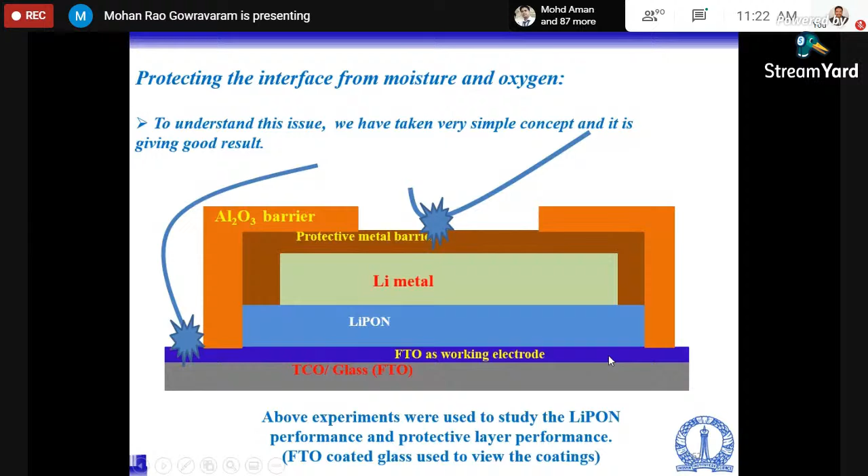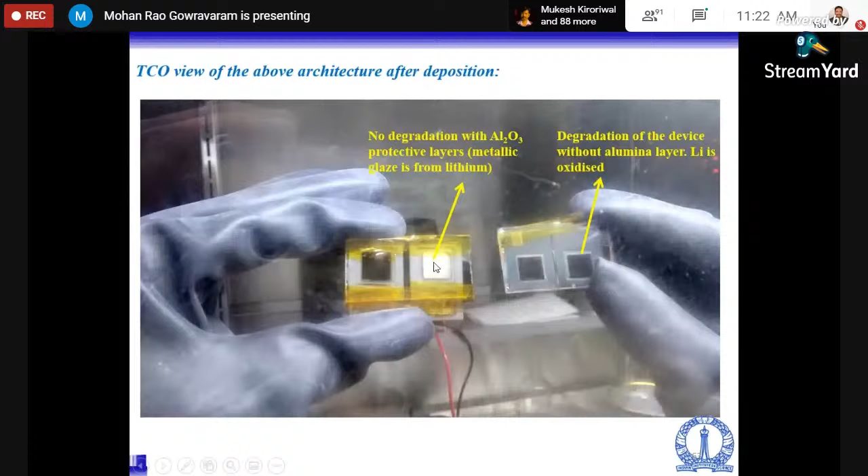Now, to check whether this is really working or not: if you do not deposit this Al2O3 layer, then what you see here is black, which means the top metal layer, that is lithium or aluminum, whatever you are giving, is getting oxidized. Whereas if you protect it with Al2O3, no oxidation takes place. It is safe. That means a protective layer is a must.

Now comes the most important thing. At the end of the day, you have to take the leads out, which means connecting two wires to the anode and cathode layers. So what is done is a tool is made to put a solder material at a controlled temperature, and this soldering is done in a glove box environment, and then it works.

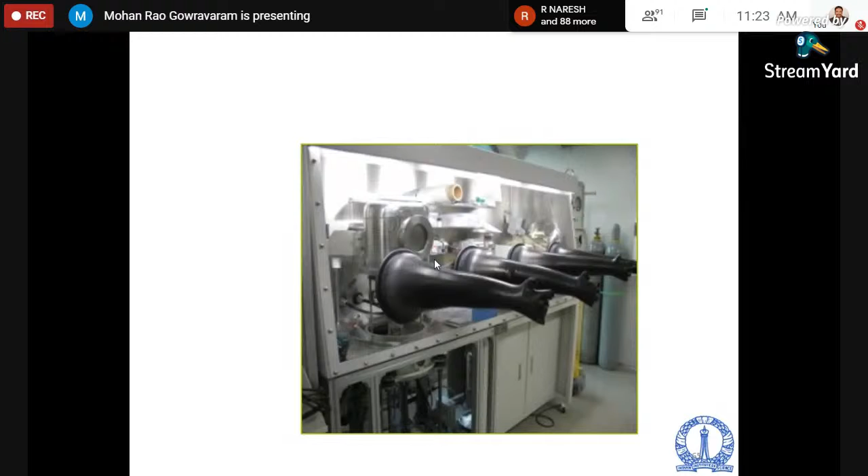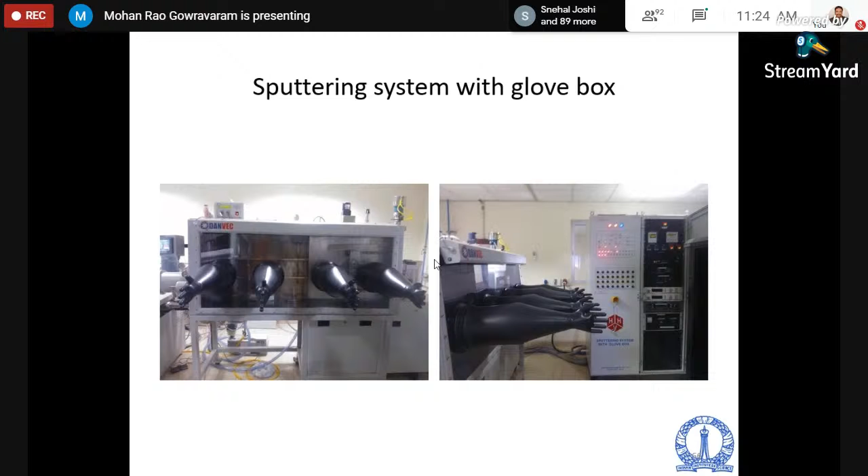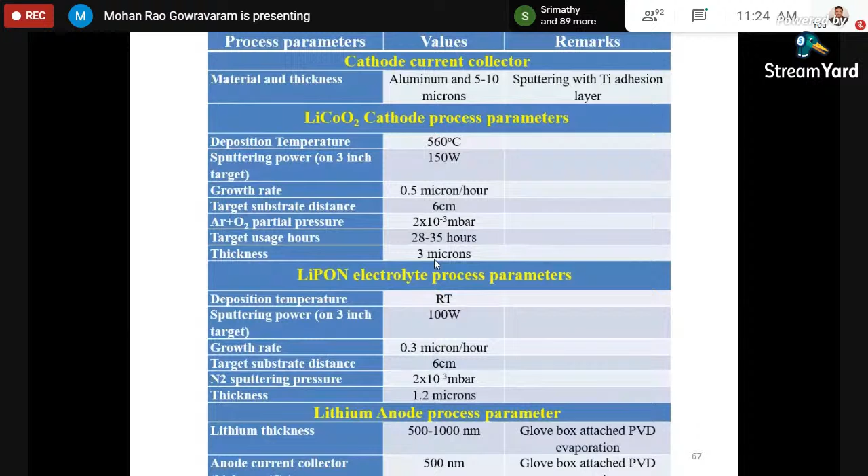Now, each of these layers has to be protected from the ambient, otherwise your reaction is going to fail. So instead of a normal sputtering system, a new kind of sputtering system has been designed which could be placed in a glove box, so that start to finish - from putting your substrate inside till packaging the battery - after all the depositions and packaging, only then is the battery taken out of the glove box. That means in between it has not seen moisture, so the device works properly. With this kind of equipment design, it started working again. We optimized the parameters inside this glove box for each of these layers, and then it started working.

Now let me tell you a story, useful for faculty who apply for projects. We go to a committee, present our project, face a lot of questions from the committee, and most of the time we are not able to answer those questions because of irrelevance, in my view. And then you will not get the money, because they are the deciding authority.

So what happened is when we proposed this project, we gave a value of about 50 microampere hour as the capacity for the battery we were going to develop. Then one of the committee members asked a question: I saw on the internet that there are people manufacturing thin film batteries which can give a few milliamp hours of capacity, far higher than what you are proposing. So why should your project be funded? Good question.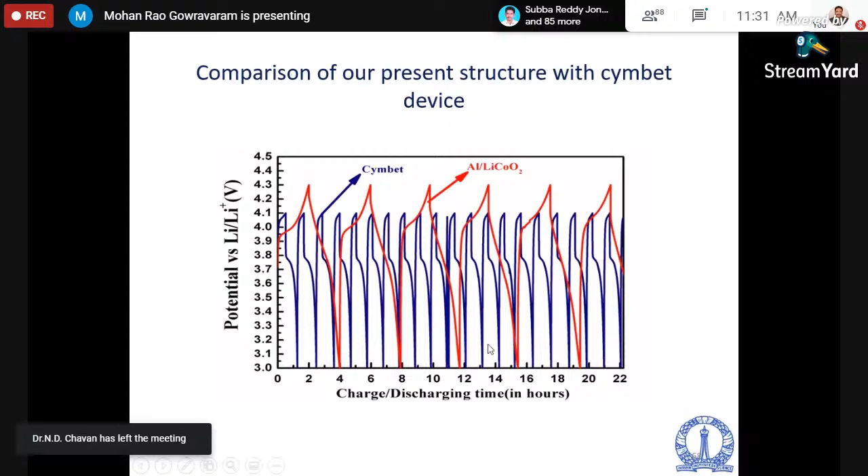So this battery that we developed, with all these glove box precautions, looked better than the commercial battery made by Cymbet Electronics. So you test its capacity. It gives you 55, and even after 100 cycles it is still about 45 microampere hours.

And then we tested further, the life existed in the battery even after about 2000 cycles, though the capacity had come down to about 30 microampere hour per centimeter square. Which means you know how to make a battery, but you don't know how to package the battery. So if you do effective packaging, the battery is going to work.

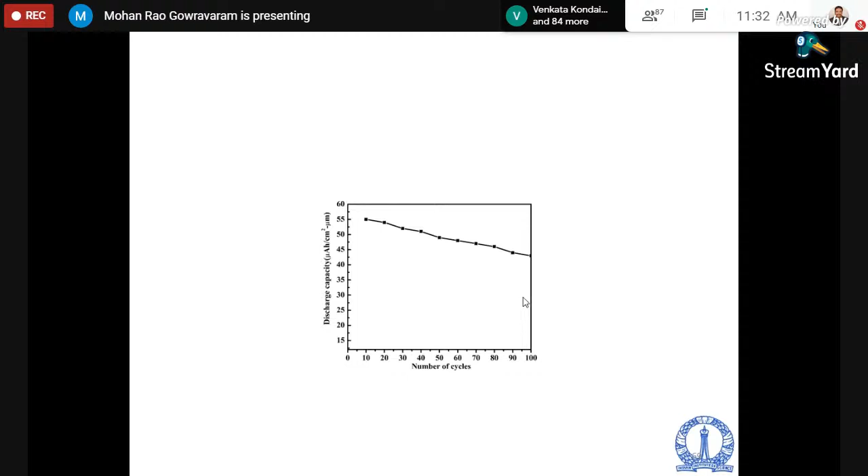Now, your job is not over. You are still getting only about 55 microampere hours and long cycle life. So what are the underlying problems involved? One is the manufacturing technology that I have already explained, some of the issues, and materials.

Now, in typical manufacturing methodology, people use electronic grade materials if you are making a thin film battery, and you use very complex equipment, and finally you end up with a simple integrated device.

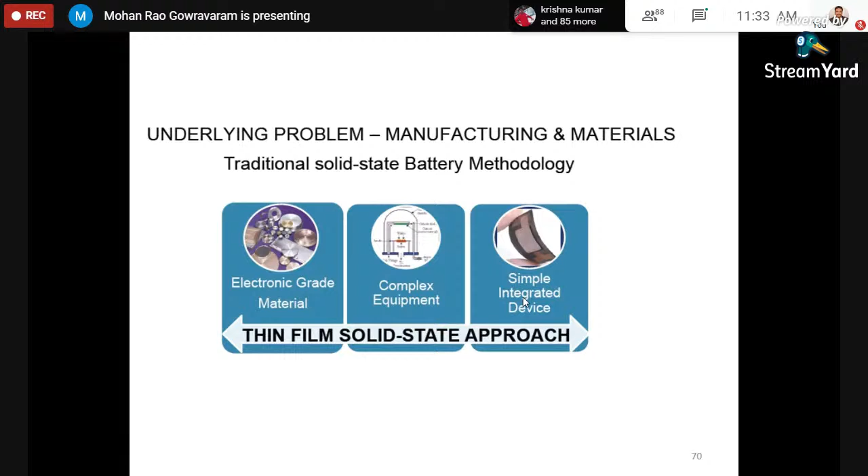So you try to analyze these issues involved. You are trying to avoid semiconductor grade materials, which are very expensive. So develop your process around inexpensive chemicals.

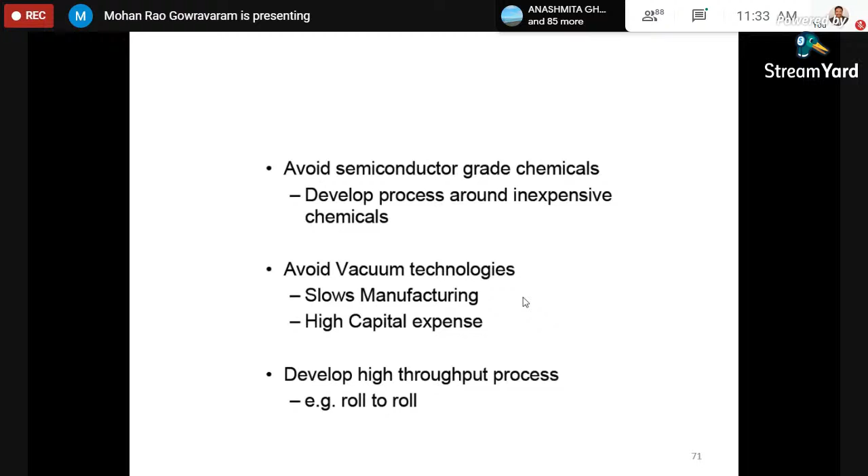I'll tell you what it is. Then avoid vacuum technology, which slows down your manufacturing process, and initial capital expense is very high. That means you use inexpensive process technologies and develop high throughput process. That means it's better if you can do roll-to-roll deposition, so that in a short time, large quantities could be produced. So the cost will come down, the battery life will increase.

So how to do this? How do you increase the capacity? There are three approaches. One is use nanotechnology, make what is called 3D batteries. I'll give you examples. Or the other one is use a process like inkjet printing, screen printing, and tape casting.

For which you have to make inks of the materials that you are using for making these batteries. Or you develop altogether new materials for the electrodes and electrolyte, such that these materials do not react with the ambient environment, so that you don't have to worry too much about your packaging and all that. This is a very difficult task. Okay, at least let's concentrate on these two topics of 3D batteries and inkjet printing.

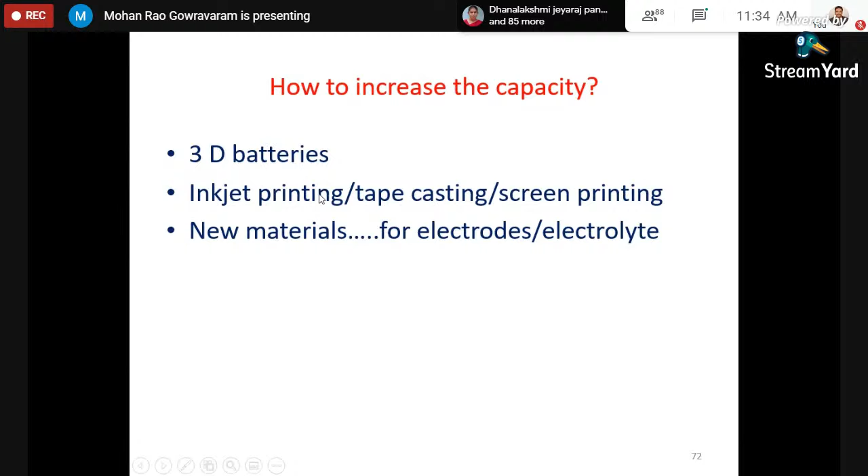Which gives you a similar capacity of 160 milliampere hour per gram. So this is the material side.

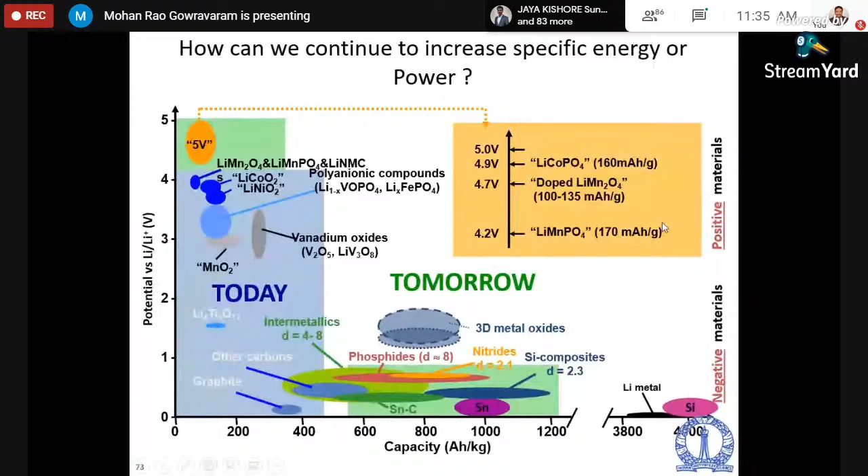Or the 3D thin film technologies, where you make nano pillars of the cathode material and the anode. So that means you have nano rods or nano pillars, surrounding which you build a battery. That means you have got several cells in a small volume. You connect them together and it gives you a higher capacity. This is the so-called 3D integrated, all solid state, rechargeable battery using nanotechnology.

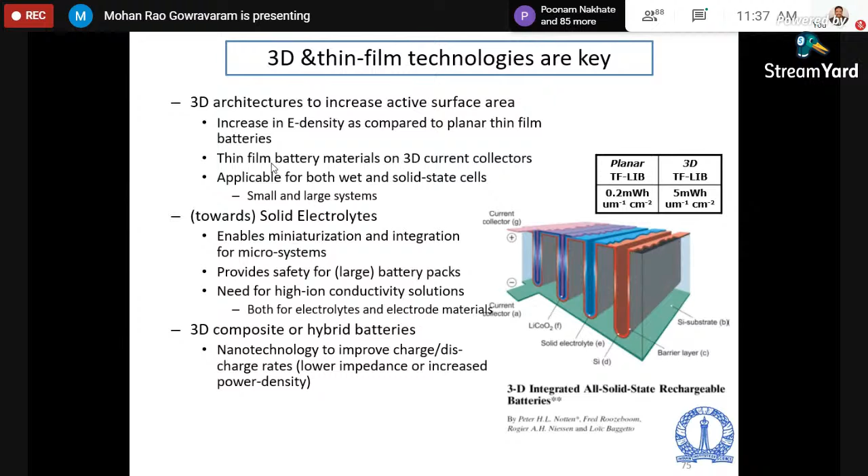So this solves several issues, like increasing the energy density as compared to planar thin film batteries. It's applicable for both wet and solid state batteries. The technology can be made small, it has safety advantages, and 3D composite or hybrid batteries could also improve the charge discharge rates because of the lower impedance.

Or you develop inks and use inkjet processing, building each of the layers separately. In inkjet printing, you design your battery's anode structure, cathode structure, and everything. Your ink will move and fill only that portion, so you don't need any other mask. Using different kinds of materials, you finally coat it with a packaging material, and your battery is ready.

But the issue here is how do you make this kind of ink with high density materials? Because there will be a lot of sedimentation that takes place, so you have to homogenize everything and do this. This is a good research topic for somebody interested in material science, developing the inks of battery materials.

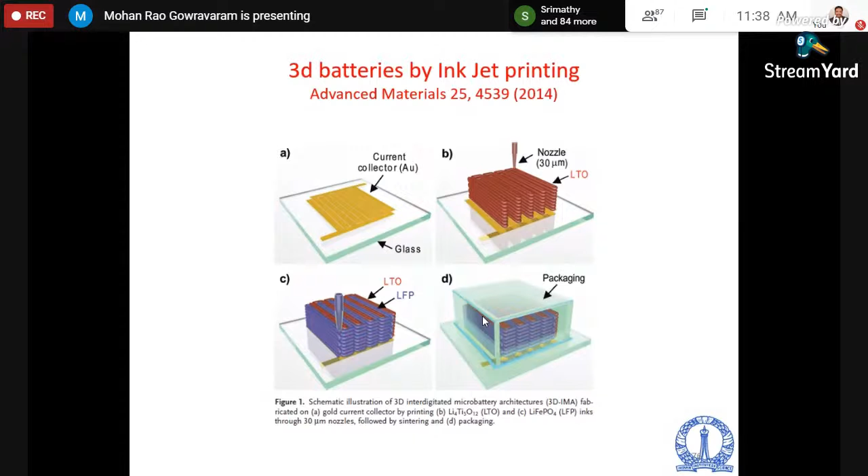Now, the entire thin film battery technology or concept started with the so-called power on chip. That means you have a chip, a microelectronic chip, and you want to build a power source onto that chip. So it becomes power on chip. Thus the thin film battery research started.

Now, is it feasible now? Let us see. If you take a 130 nanometer line DRAM chip, it consists of about 10 to the power of 7 or 10 to the power of 8 transistors, with a clock speed of 1.68 gigahertz, and consumes 2.84 watts with an operating voltage of 1.1 volt. This is old data; the present day DRAM data will be much better than these numbers. Let us see what happens with this number.

Now, using the present day thin film battery technology, if you try to power this kind of device, it needs 10 to the power of 5 layers. That means your alternate layers have to be 10 to the power of 5. We struggled hard to have 3 or 5 layers in this battery, so you should be able to develop 10 to the power of 5 layers. Now each transistor consumes about 10 to the power of minus 8 watts.

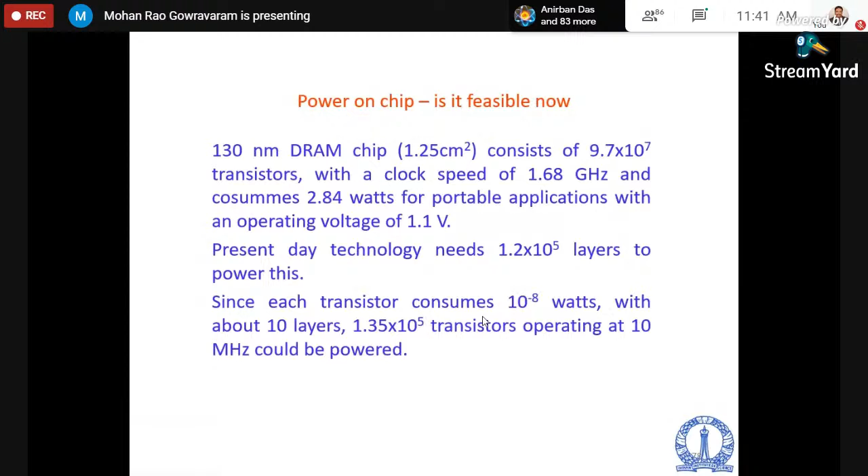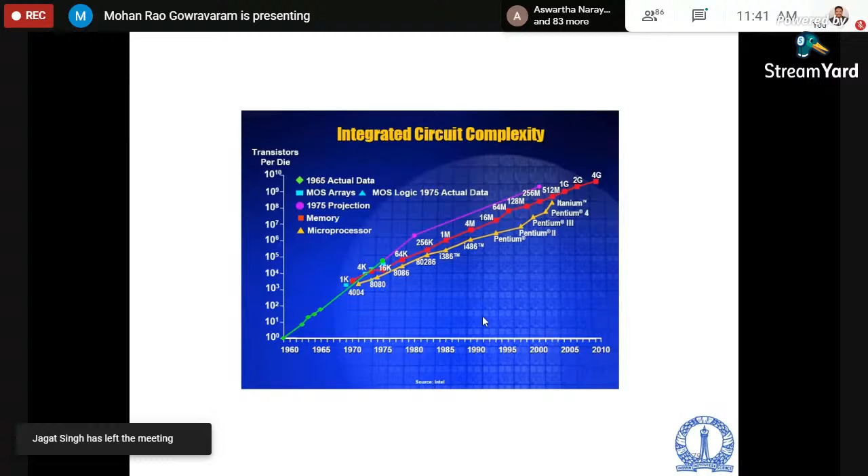Now, if battery research also progressed like microelectronic industry research, then what happens? Battery research gains about 6% capacity every year. But Moore's law says that the number of transistors on a computer microchip will double every 2 years. For this, you have got proof; for the last 50 years, it has followed. Now, if your battery technology had also developed like this, today you would have had a battery which is of the size of a penny.

That means a small one rupee coin, which could have driven a car. Is it possible now? No.

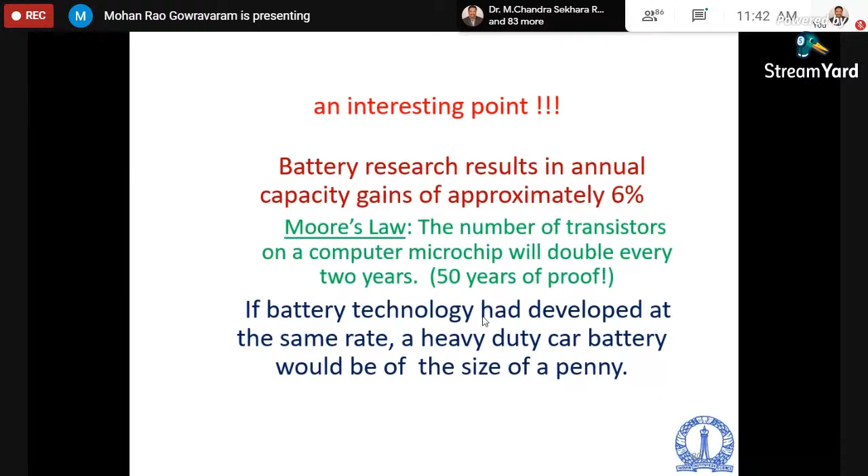Some implantable medical devices like hearing aids, aids for epilepsy, and blood pumps draw a current of about 1 to 4 microamperes, and could be powered using this kind of thin film battery with present day technology. Or you can use it for non-volatile memory backup, like clocks and similar devices.

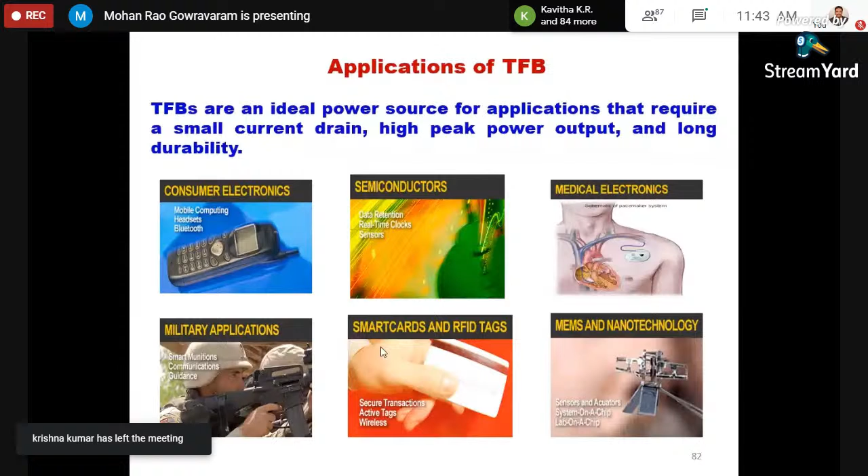So this shows the list of applications where you can use thin film batteries in your daily life. Today there are a number of manufacturers, but still all of them are at a prototype stage where the capacity is not very high. Over a period of time, we hope things will improve. Most of them are based in the USA.

So this is the story of thin film batteries that we have. This was funded initially by Defense for the first phase. Once we saw the failure, with the new idea of putting a glove box and so on, we approached the Ministry of Information Technology. They gave generous funding, and with that, the second phase battery, a prototype with 55 microampere hour per centimeter square per micrometer thickness, working for about 2000 cycles with a reduction of about 40% capacity, has been developed. The entire work was done by several project staff and 3 PhD students.